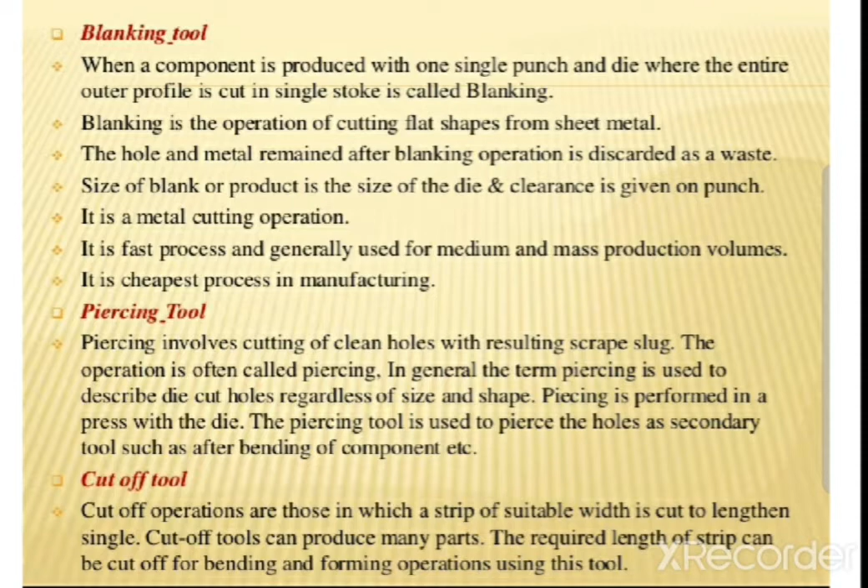Parting tools. Parting off is an operation that involves two cut-off operations to produce a blank from the strip. During parting, some scrap is produced. Therefore, parting is the next best method for cutting blanks. It is used when blanks will not nest perfectly. It is similar to the cut-off operation except the cut is in a double line. This is done for components with two straight surfaces and two profile surfaces.

Trimming tools. When cups and shells are drawn from flat sheet metal, the edge is left wavy and irregular due to uneven flow of metal. This irregular edge is trimmed in a trim die. Shown is flanged shell, as well as the trimmed ring removed from around the edge, while a small amount of material is removed from the side of the component in the trimming tool.

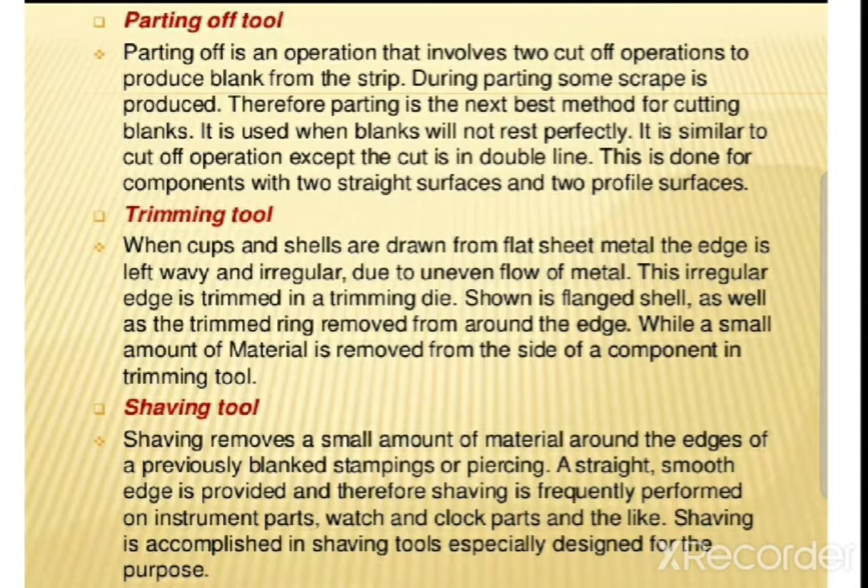In the shaving tool, shaving removes a small amount of material around the edge of a previously blanked, stamped, or pierced part. A straight, smooth edge is provided, and therefore shaving is frequently performed on instrument parts, watch and clock parts, and other precision parts that require shaving. So shaving is accomplished in shaving tools especially designed for the purpose.

Now the tools are specifically classified as progressive tool, compound tool, and combination tool. The progressive tool differs from the stage tool in the following aspect: in the progressive tool, the final component is obtained by progressing the sheet metal or strip in many stages. In each and every stage, the component gets its shape stage by stage, and the full shape is obtained at the final stage.

And what is a compound tool? The compound tool differs from the progressive and stage tool by the arrangement of punch and dies. It is an inverted tool where blanking and piercing take place in a single stage, and also the blanking punch will act as the piercing die.

Then what is a combination tool? In a combination tool, two or more operations will be performed simultaneously, such as bending and trimming, which take place in a single stage. In a combination tool, two or more operations such as forming, drawing, extruding, embossing may be combined on a component along with various cutting operations like blanking, piercing, broaching, and cutoff. So these are the different types of tools.

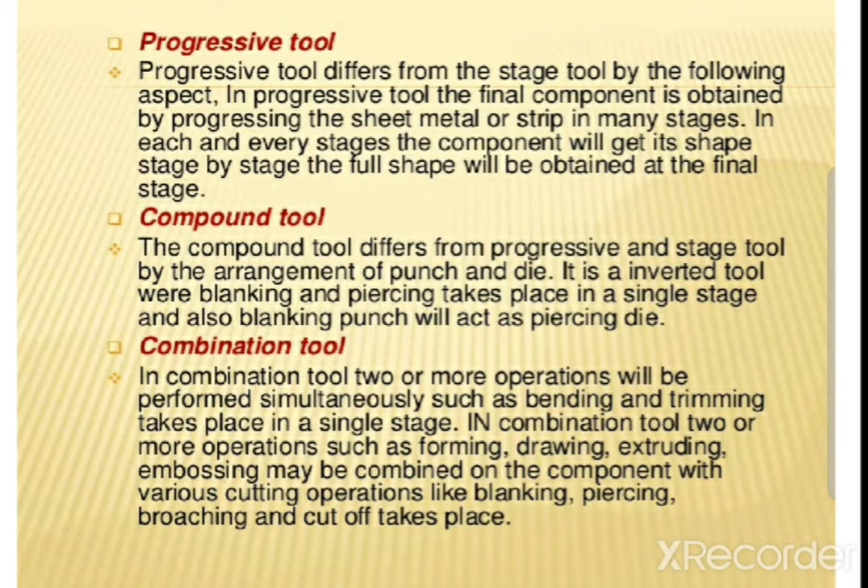So major operations by compound tool we'll discuss. In compound tool, blanking is the operation of cutting a flat shape from the sheet metal. The article punched out is called blank and is the required product of the operation. The material remaining after blanking is discarded as waste.

In case of piercing, it is a cutting operation by which various shaped holes are made in sheet metal. Piercing is similar to blanking, except that here the desired product is the remaining material, the material cut out from the hole being waste.

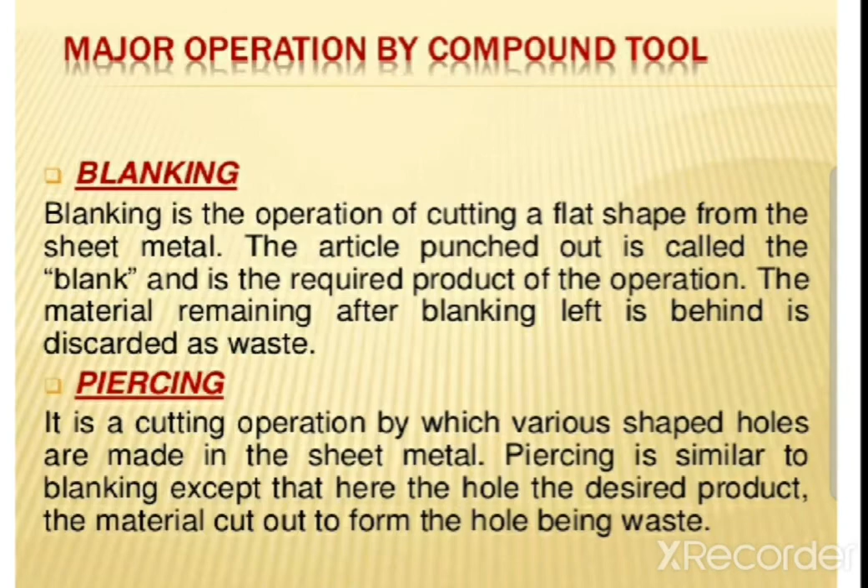So in this lecture we will discuss strip layout. What is strip layout? Strip layout plays an important role, especially in the design of the press tool. Strip decides the economic utilization of the workpiece and helps in decreasing the cost of the job and reduction in production time by increasing the number of components.

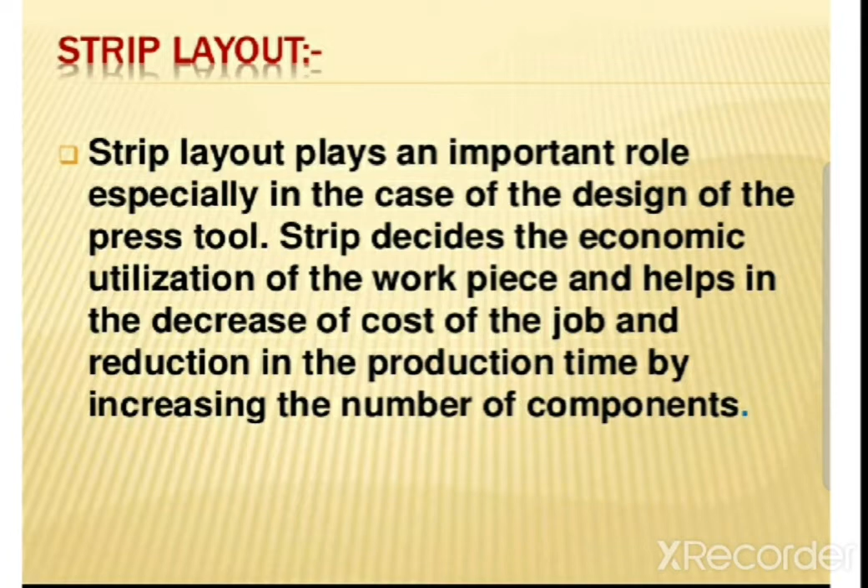I will repeat. Strip layout plays an important role, especially in the design of the press tool. Strip decides the economic utilization of the workpiece and helps in the decrease of cost of the job and reduction in production time by increasing the number of components.

How can you define strip layout? The first step in strip layout is defining the strip. This process involves naming the strip assembly and the strip part, and defining the width and height of a station, the project shortcut, the number of stages, and an offset before and after the strip.

You can specify a prefix for the name that is generated for parts placed inside the strip assembly. So parts include instances of article and stamp reference parts.

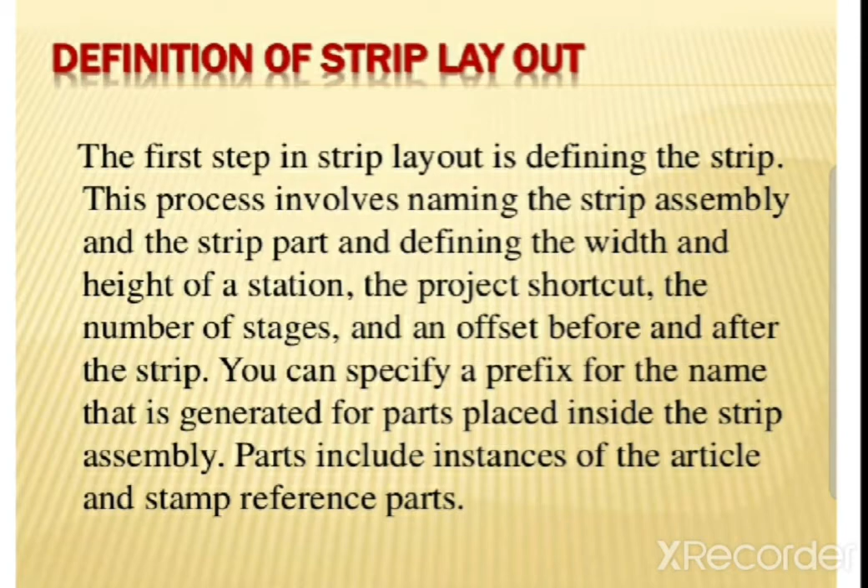So defining the strip layout is very important. Strip layout represents the sequence of logical workable operations, which is to say a sequence of ideas. If this sequence of operations has an error, the error will surely emerge in the try-out press.

Factors to be considered while designing the layout are shape of the blank, production requirement, grain direction, burr side, and stock material.

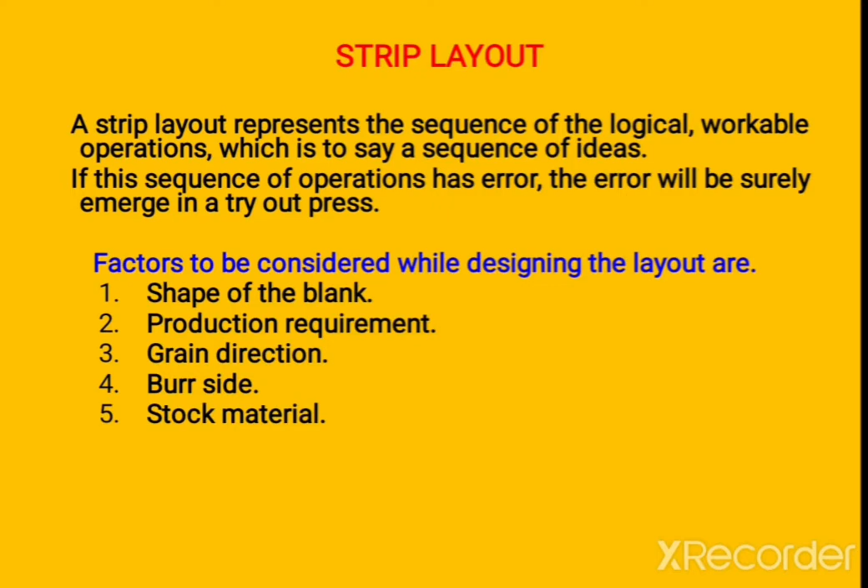Now we will discuss strip layout for blanking tools. Blanking tools produce blanks out of the strip or unit stock. None of the edges of the strip or unit stock forms an edge of the blank. Blanking is the most efficient and popular way of producing intricate and closely toleranced blanks. The profile and accuracy built into the tool will be reproduced on the blank.

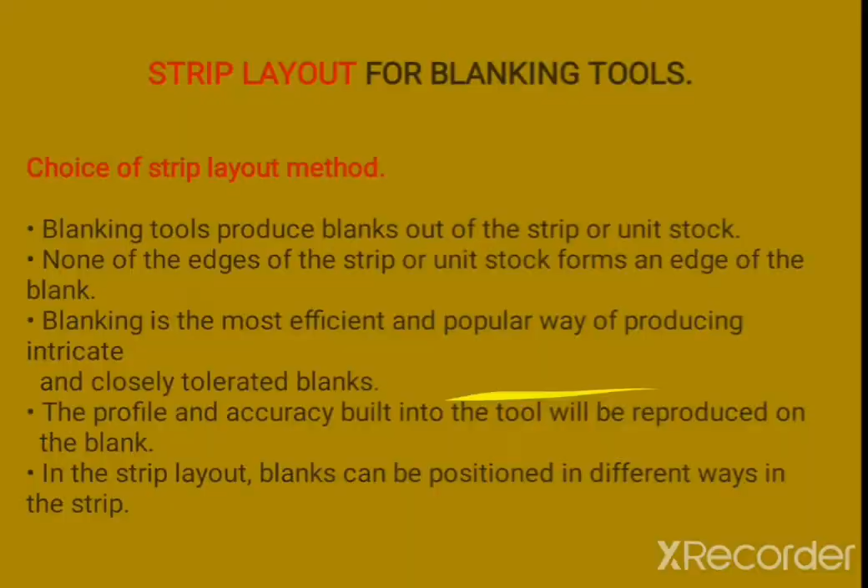In the strip layout, blanks can be positioned in different ways in the strip. Shape of the blank is also important. The contour of the blank decides the position in the strip. Some of the blanks are laid at an angle.

If production requirement is less, then material conservation is necessary, but this must not increase the tool cost. A gang die may be suitable for mass production.

The grains are found in the sheets when they are rolled. Bending the strip along the grain direction results in cracks and fracture.

So burr side is also one of the important things. It is a decisive factor in laying the strip. In blanking, burr is found on the punch side. In piercing, burr is found on the die side.

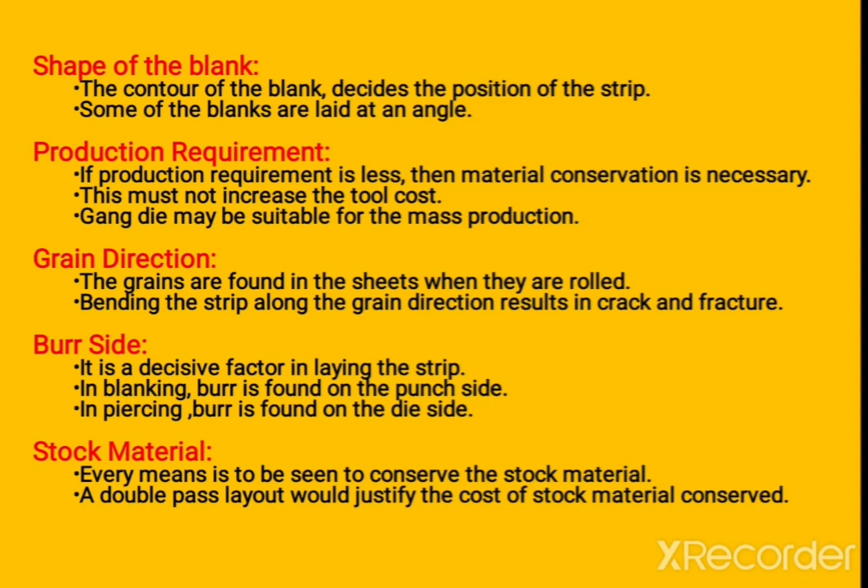Stock material - every means is to be seen to conserve the stock material. A double pass layout would justify the cost of stock material conserved. So all these are very important terms which we should consider while doing strip layout.

Now what are the different types of strip layouts? First is single row, one pass layout. This is the most popular way of laying out the strip. Blanks are arranged in a single row.